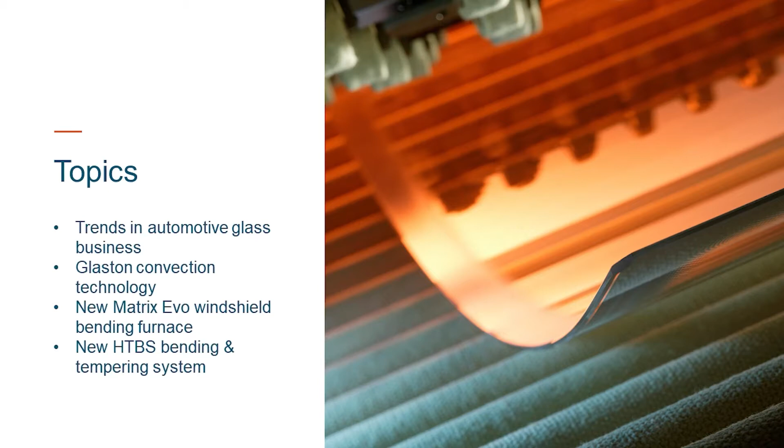Next, let's jump to the wonderful world of automotive heat treatment. What we are going to speak about today: first, the trends in the automotive glass business. Then we'll cover Glaston convection technology and what benefits it gives to the final processor. Then we will speak about the new Matrix Evo windshield bending furnace, and last but not least, a few words about our new HTBS bending and tempering line.

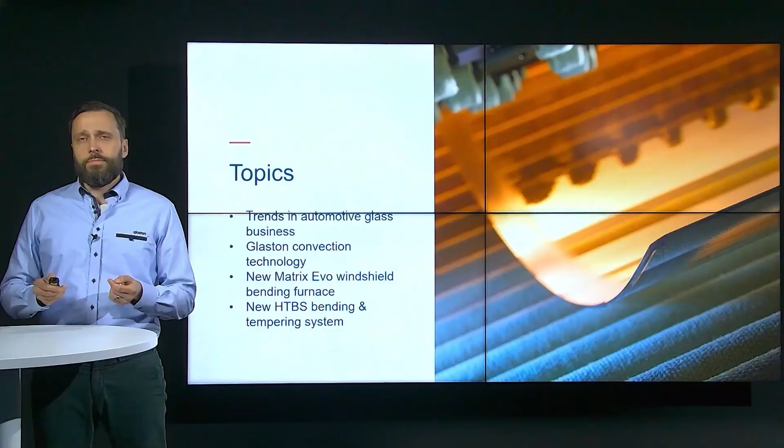What are the trends in the sunroof and windscreen business? We can see clearly that the glasses are getting bigger and more complex, and together that is a challenge for the glass processor. These days there is also a lot of technology integrated into the units. In windscreens you have rain detectors, cameras, and that technology needs to be hidden. This results in the screen printed or digital printed areas getting bigger and bigger, not to mention in sunroofs where it might be up to 50% of the total area. Last but not least, the use of coated glasses is getting more common, mostly in the sunroof business, but also increasingly in the higher segment of windscreens.

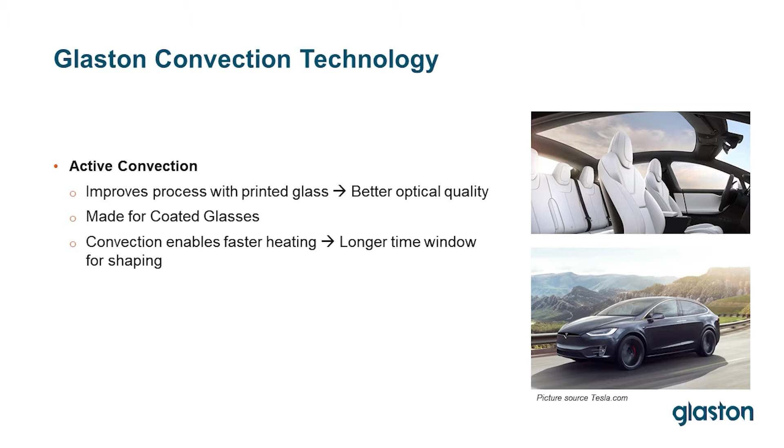What benefits does Glaston convection technology give, especially to address those facts we saw on the previous slides? When we heat the glass by convection, it improves the process with printed glasses. With old technologies, radiation only, there is always a temperature difference between the clear and the screen printed or digital printed area, because the printing absorbs more radiation than clear glass. When we heat by convection, it doesn't see if it's clear or printed, but heats the area much more evenly, resulting in better optical quality.

Convection is also made for coated glasses, so when heating units where one or two glasses are coated, this gives a much more even end result. And when we heat by convection, we can also heat up faster. A faster preheating cycle results in a longer time window for shaping, and with a longer time window for shaping, we have better repeatability and also capability in terms of shape.

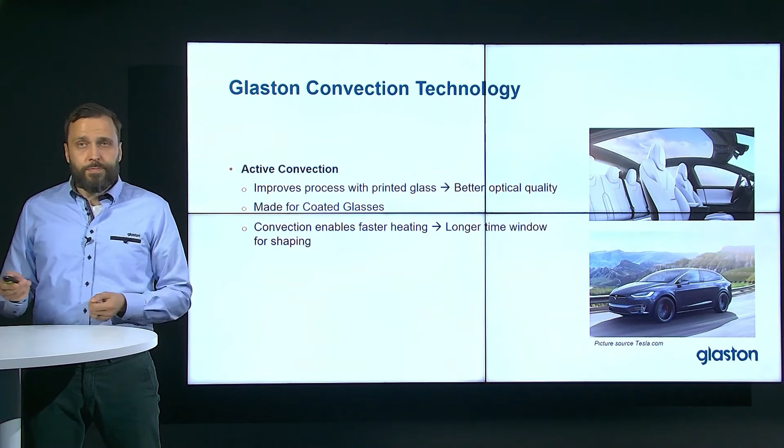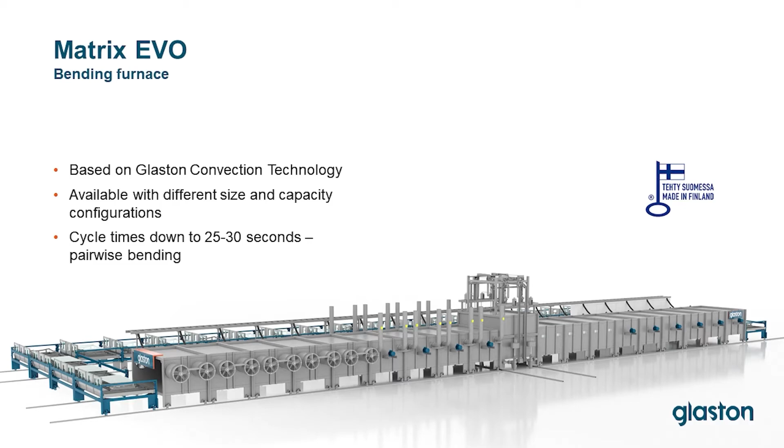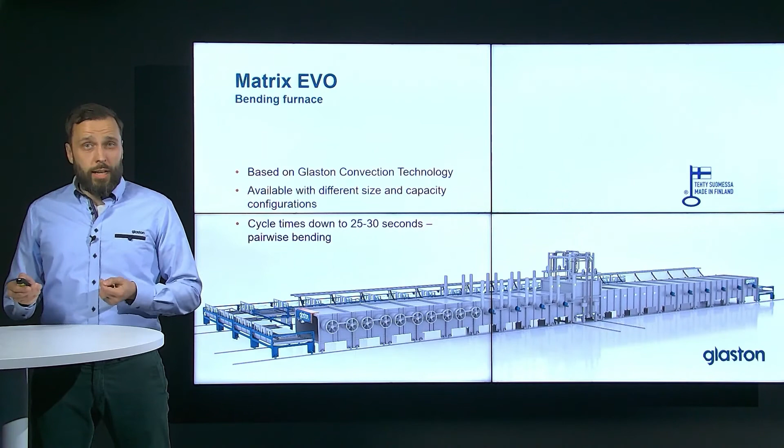So today we are going to introduce our new Matrix Evo bending furnace, which is based on Glaston convection technology. It's available in different size and capacity configurations, and if we speak about cycle time, we can go down to 25 to 30 seconds - and that means pairwise bending, so a cycle time for two pieces. If you are interested to hear more about our Matrix Evo bending furnace, feel free to approach us, we are more than delighted to help you.

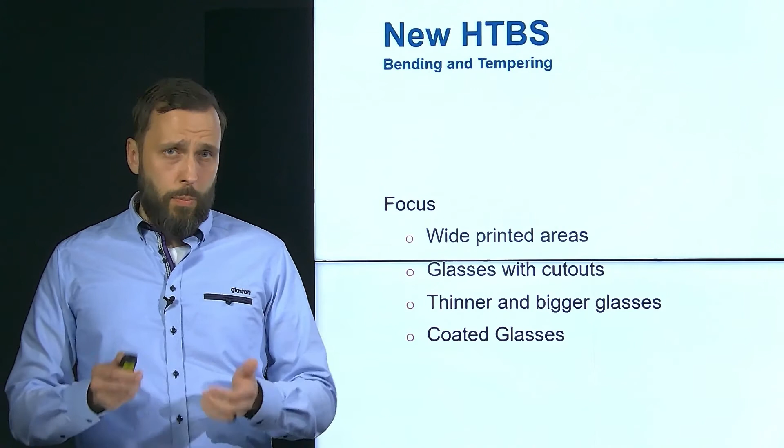We are also going to introduce our new HTBS, horizontal bending and tempering line. What is the focus with our new HTBS? We can see the trend that across the automotive business, printed areas are getting wider and wider. Also, there are more complex glasses with cutouts, which is a challenge from the heating point of view. Also the glasses are getting thinner but at the same time bigger, and these two combined make it a challenge for the glass processor, and we want to help them make it happen. There is also a slightly increasing amount of coated glasses in use, not yet so common, but we want to be prepared for this trend.

We are going to have an overview from our latest installation. Unfortunately we are not able to show you too much about the production itself, but we'll give you a quick overview of how our customer is utilizing our new HTBS furnace on site.

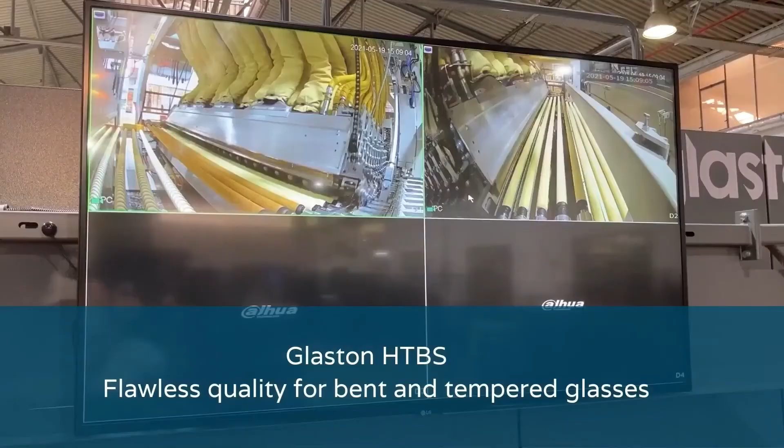So what is new in HTBS? It is the furnace to meet the highest quality standards. When we started development of the new HTBS, our target was to enable processing of the most complex glasses in the market. We are able to do this by having the most dense control matrix in the market - we have narrowed down our control matrix so we can focus heating on very small areas, making it possible to run glasses with cutouts or with white screen printings.

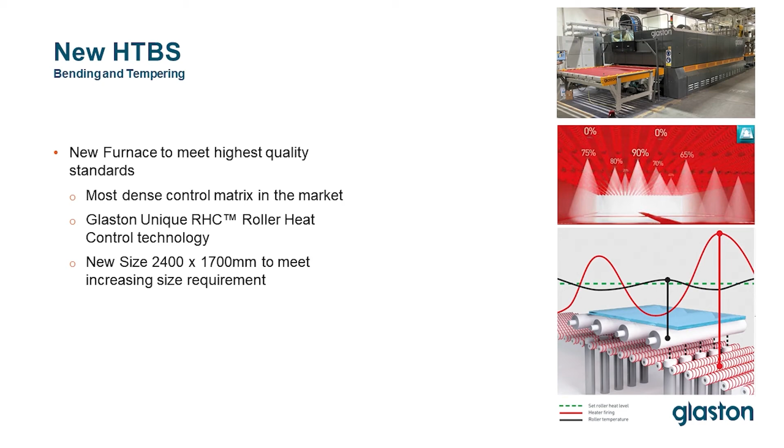On top of that, we are also utilizing Glaston's unique roller heat control technology. Unlike older technologies where we only measure the air temperature, here we actually measure the ceramic roller temperature, which means that when running, say, room temperature glass into the furnace, we have much more responsive heating because we can measure immediately when the ceramic roller temperature drops, and focus the heat on that specific spot.

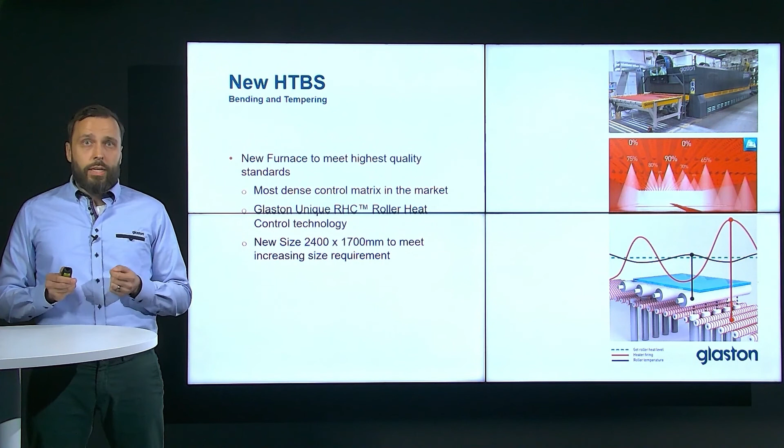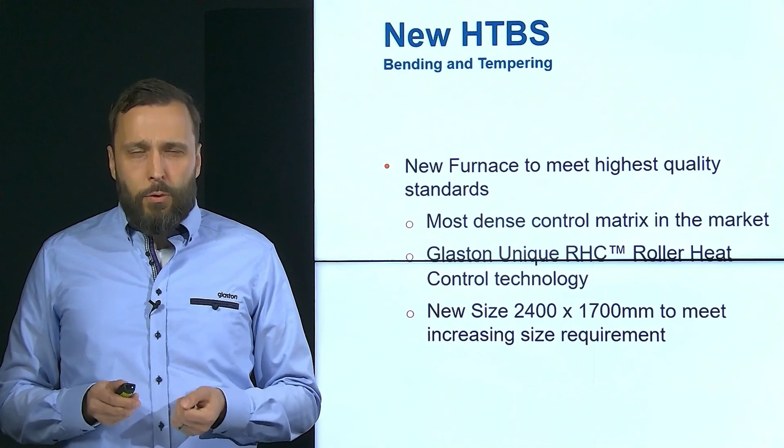Then we also have the new size, 2.4 meters by 1.7 meters, to meet increased size requirements. We can see clearly, especially in the bus segment, there is a need for slightly more height for the bus side lights. If you have any questions about our new HTBS technology, feel free to contact us - we are more than delighted to help you. Thank you.